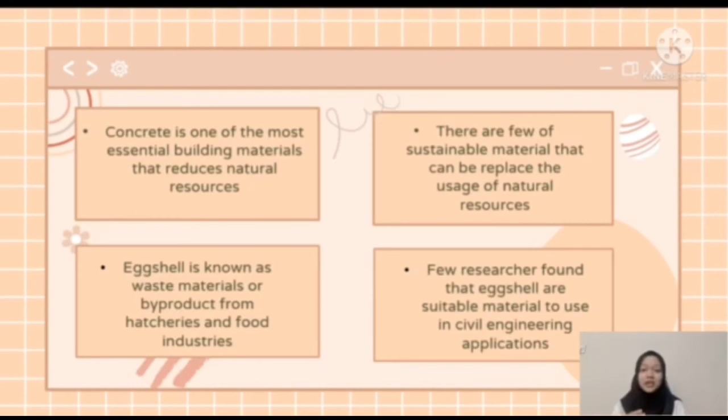In this experiment, eggshell powder will be tested for its possibilities in concrete and the performance of eggshell powder concretes in terms of strength properties.

For the methodology part, it starts with broken eggshells collected from local sources. Shells were cleaned with regular water and air dried for about 5 days at temperatures ranging from 25 to 30 degrees.

Secondly, shells were then hand crushed, ground and sieved through a 90 nm sieve. The material that passed through the 90 nm sieve was used to replace the cement, while the material left behind was discarded.

Next, crushed blue granite was used as coarse aggregate and well-graded river sand as fine aggregate.

Fourthly, coarse aggregate was placed into the mixer drum, and a portion of the required water quantity was poured into the drum. Lastly, cement and eggshell powder were placed into the drum and sand was spread over the powder, then mixing started.

The percentage of eggshell powder that replaced cement in this concrete is about 15%. The remaining mix design water quantity was added into the mixer drum during the mixing process to ensure full mixing of the ingredients.

After that, the specimens were prepared and left for 24 hours before being demolded and put in normal water to cure until the test age.

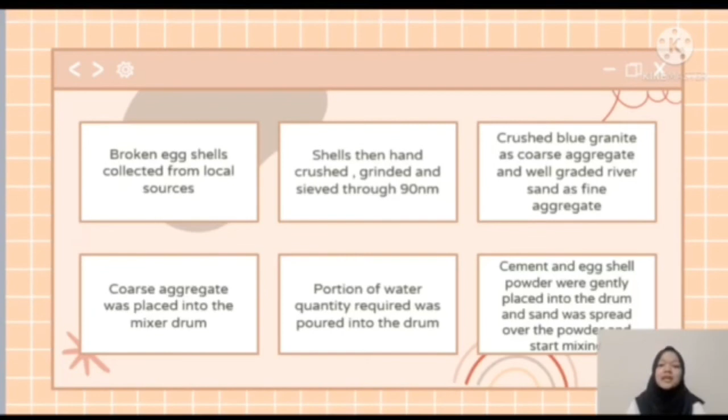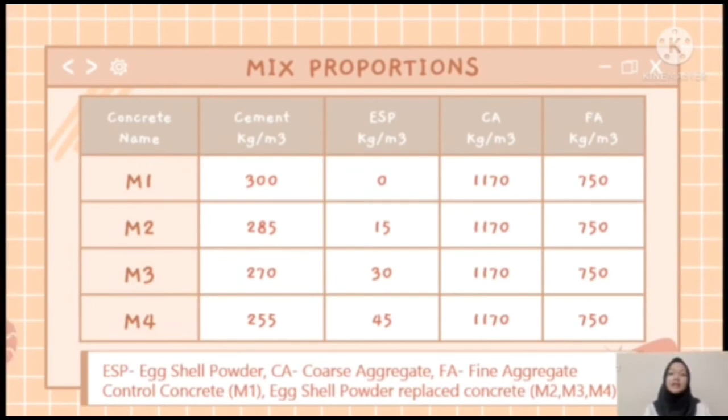For concrete naming, M1 stands for control concrete, while M2, M3 and M4 stand for eggshell powder replacement concrete. So in M1 there is no eggshell powder contained. This is all the quantity needed in the concrete ingredients.

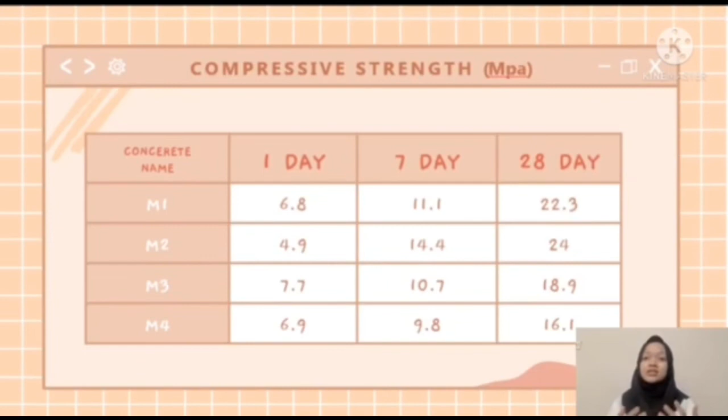This is the table for compressive strength, which is the first test to determine strength properties of concrete. A compression testing equipment with a capacity of 2000 kN was used to assess compressive strength. The test was carried out on 150 mm cube specimens for periods of 1 day, 7 days and 28 days.

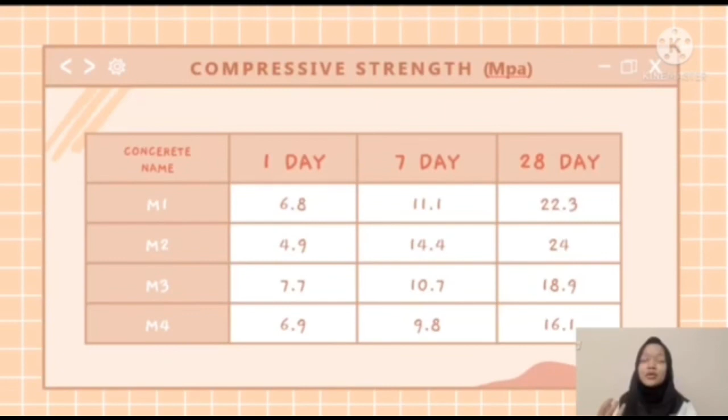The compressive strength test can be concluded as follows: compressive strength was higher than control concrete for 5% eggshell powder replacement at 7 days and 28 days of curing age. Eggshell powder replacements greater than 5% had lower strength than control concrete. So this is what we can conclude from the table of compressive strength.

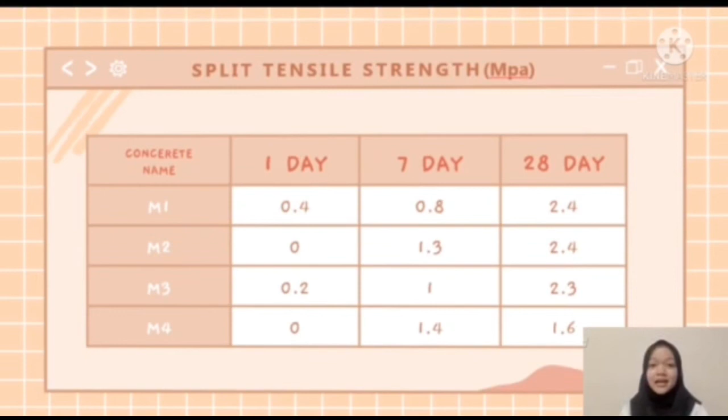Saturated surface dry specimens were stored in a 105 degrees Celsius hot air oven until they reached a consistent weight. After removing the item from the oven, it was allowed to cool to room temperature.

These specimens were totally submerged in water and their weight gain was monitored until they reached a stable weight. The concrete quality was assessed using absorption at 30 minutes and final absorption, which is when the difference between two consecutive readings is almost minimal. All of the concrete's final absorption was found after 72 hours. That's the final time for the water absorption test.

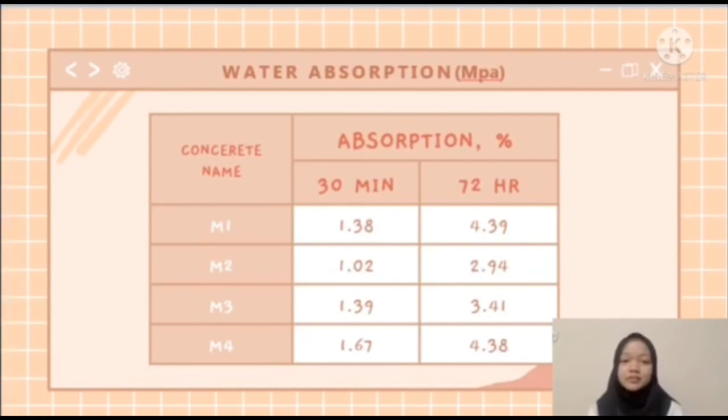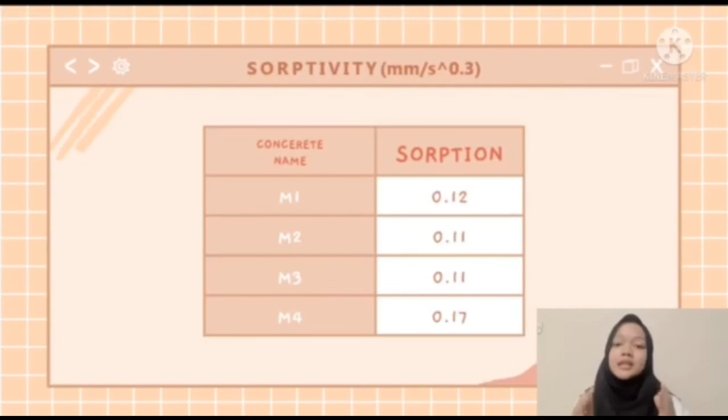The specimen was allowed to cool to room temperature as indicated in the water absorption section. The cubes were placed in the water after the cooling process, ensuring that only the bottom surface of the specimen came into contact with the water. The weight gain of the specimens at regular intervals was used to measure the moisture rise in the cubes. The weight gain of the specimen per unit area of the concrete surface and the square root of the time for the suction periods were then used to compute the concrete sorptivity.

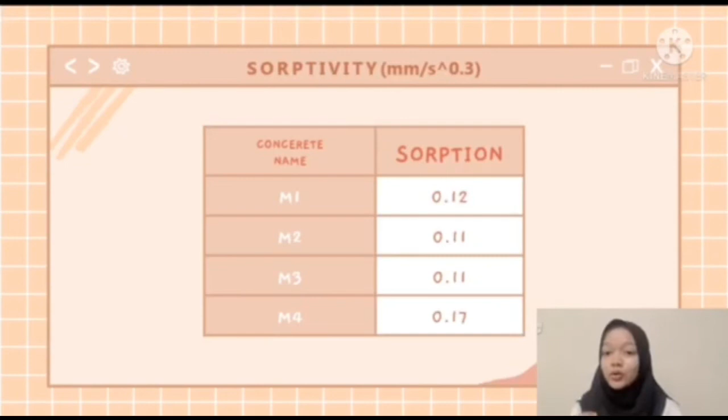From the table, we can conclude that sorptivity of the concrete was comparable with control concrete up to 10% eggshell powder replacement. However, sorptivity of 15% eggshell powder concrete was higher than control concrete. The maximum sorptivity was for eggshell powder replaced concrete, with 0.17 mm per second to the power of 0.5. Sorptivity decreased with strength and increased with water absorption. That's all that we can conclude from the table of sorptivity tests.

In the discussion of this experiment, the chemical makeup of eggshell powder is extremely similar to that of limestone. As stated earlier, eggshell powder and limestone can be tested in the same situation of replaced concretes in strength property.

Point 2: eggshell powder in cement replacement also comes out with different results of strength properties. This can be seen as eggshell powder can result in either high or low strength of concrete after being tested, according to the percentage of eggshell powder added into the concrete mixture, and it also depends on the age of the specimen.

Point 3: there are a few main factors that play an important role in controlling the transport properties of concrete, which are the volume of the paste matrix, the pore structure of the bulk matrix, and the interfacial zone around the aggregate particles.

Point 4: the performance of concrete depends on the particle size of eggshell powder. It can improve the performance of concrete if the particle size of fine aggregates like eggshell powder becomes smaller, ensuring faster interaction with the other components of concrete, as reducing the particle size increases its reactivity.

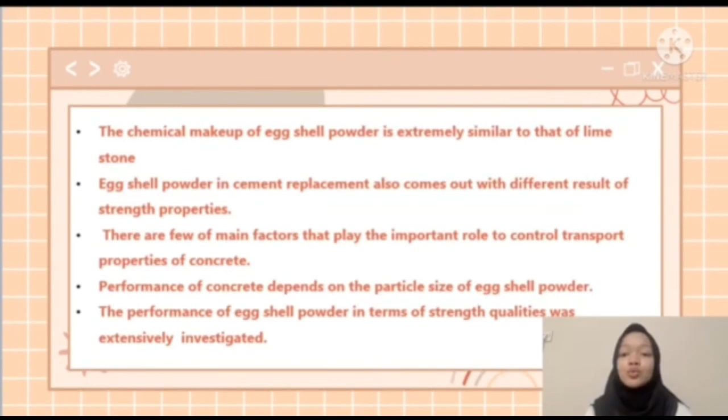The last point of discussion is that the performance of eggshell powder in terms of strength qualities was extensively investigated, including compressive strength, split tensile strength, water absorption, and sorptivity. All of these tests have their own function and purpose toward concrete according to the curing days.

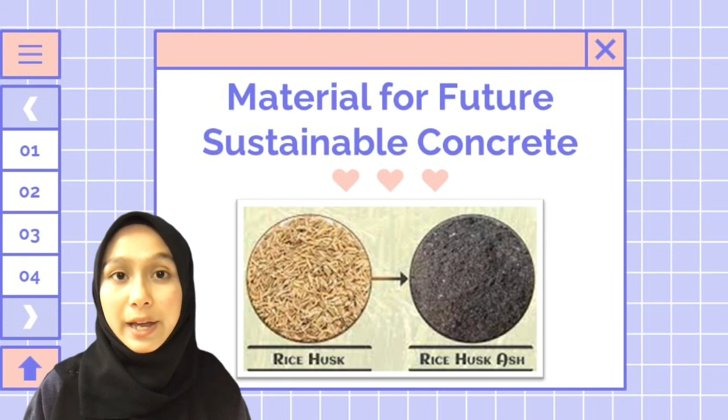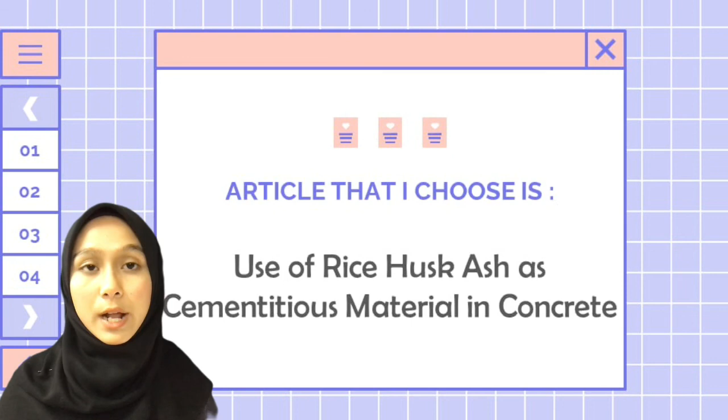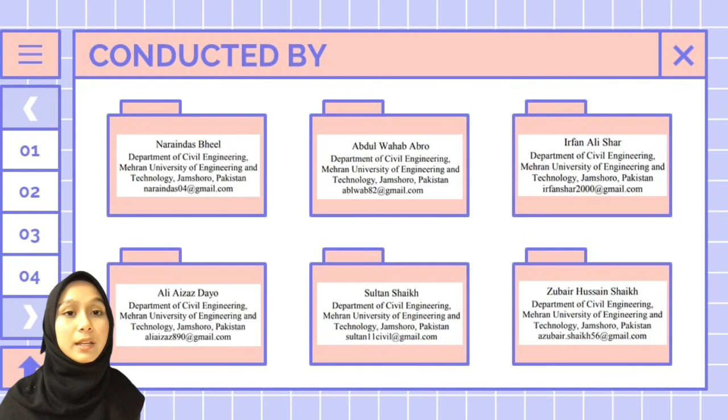In this project, students are required to do research about future sustainable concrete or bricks. As for me, I chose RHA, which is rice husk ash, as the material used in sustainable concrete. For the article, I chose one titled 'Use of Rice Husk Ash (RHA) as the Cementitious Material in Concrete.' This article was conducted by six researchers from the Department of Civil Engineering, Mehran University of Engineering and Technology at Jamshoro, Pakistan.

Firstly, I will explain the introduction. In this article, they focused on the use of rice husk ash (RHA) as a partial substitute for cement in concrete, to reduce its cost and provide an alternative processing method using agricultural industrial waste. The objective of this research is to determine the fresh and hardened concrete properties using RHA at 0%, 5%, 10%, 15%, and 20% by weight.

In this era of globalization, the use of concrete will increase demand for its ingredient resources, which are cement, sand and gravel. The making of cement can produce pollution. It's said that 1 ton of carbon dioxide is produced per 1 ton of cement made, while 1.6 tons of natural resources are needed to produce 1 ton of cement.

This shows that using natural resources is better than manufacturing cement, which produces carbon dioxide. It can reduce waste and carbon dioxide emissions into the surrounding air, which can affect the human respiratory system. So having RHA as a replacement for cement can help save the world from pollution.

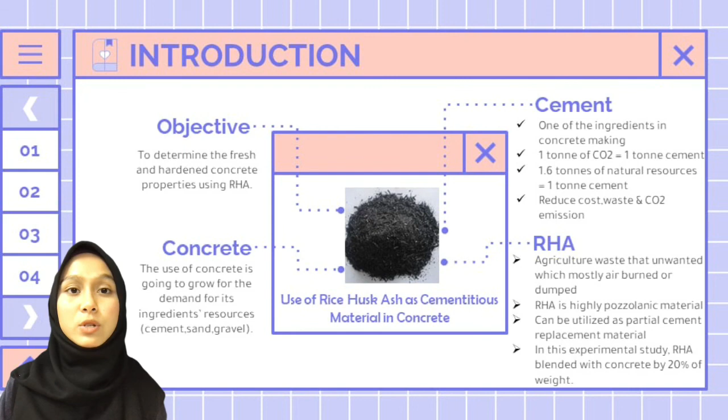Besides, RHA is an agricultural waste that is unwanted, mostly air burnt or dumped. To avoid wasting it, RHA is used in making concrete. RHA is a highly pozzolanic material that can be used as an additional material in concrete, decreasing environmental problems. It also has a silica content that can be utilized as a partial cement replacement material. So in this experiment, RHA was blended with the concrete at 20% by weight.

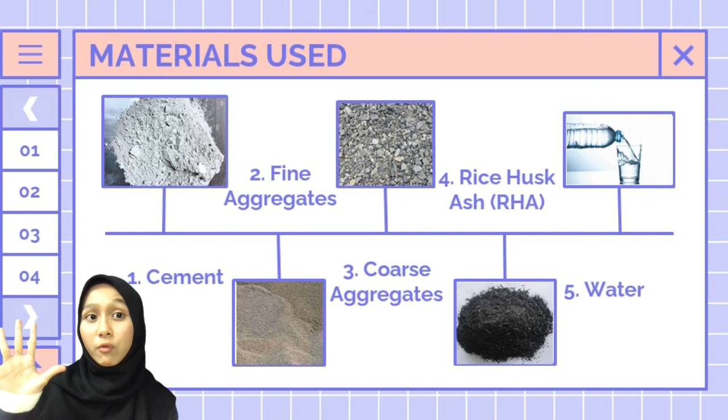Secondly, I will explain the method used in this research. The materials used are cement, fine aggregate, coarse aggregate, rice husk ash (RHA), and water. The tests were done using a total of 90 concrete samples, 45 cube samples and 45 cylinder samples. Several trial mixes were prepared using variable cement or binder, coarse aggregate, fine aggregate and water to get the optimum mix.

While getting the desirable mix, RHA was used as a cement substituent material to determine the characteristic strength of the concrete specimens. Ultimately, these concrete specimens were tested on a UTM while obeying the British Standard BS code. In this study, concrete cubes were cast for compressive strength testing, and cylinders were cast for splitting tensile strength testing. Three concrete specimens were cast for each proportion, and an average value of the three specimens was taken as the final result.

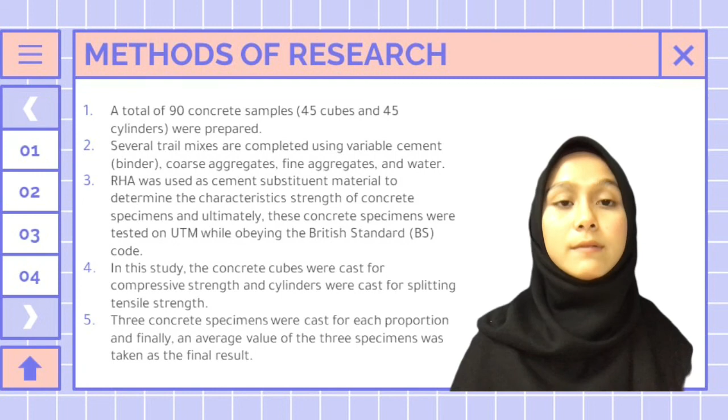Based on this article, the work was completed in the concrete laboratory of the Department of Civil Engineering, College of Science and Technology. Third, I will describe the results and discussion of this research. The findings are classified into three tests: Test A, Test B and Test C. The data was tabulated in a graph.

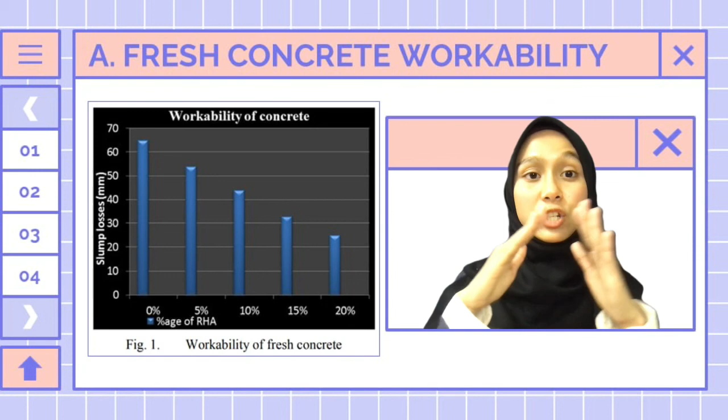First, an experiment was done to know the fresh concrete workability. A test of the flow of fresh concrete was conducted using a slump cone, with dimensions of 10 cm top diameter, 20 cm bottom diameter, and 30 cm height. The graph shows the maximum flow of concrete was 65 mm while using 0% RHA as cement substituent material, and the minimum workability was 25 mm at 20% RHA by weight. It was concluded that the flow of fresh concrete decreases with an increase in the amount of RHA in the concrete. The experimental results are shown in figure 1.

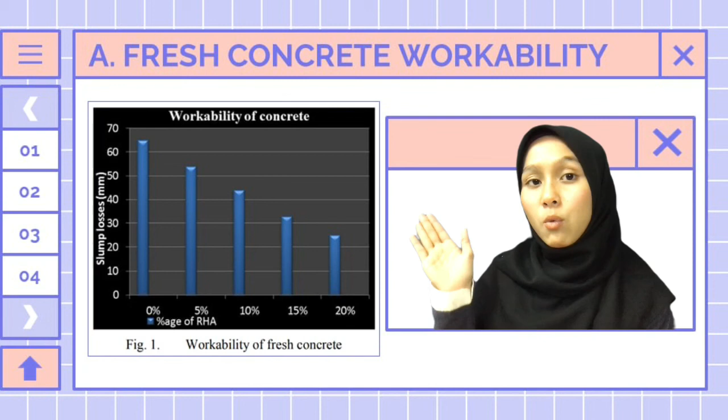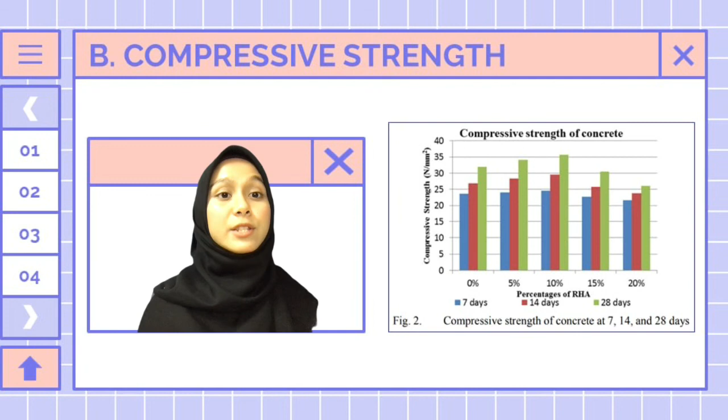Next, Test B, the compressive strength test, was conducted on cubes with volume 100 mm x 100 mm x 100 mm using different RHA percentages. Three specimens were cast for each proportion, and an average value was taken as the final result. The compressive strength was maximum at 10% RHA used as cement substitute material, and minimum at 20% RHA, at 7, 14 and 28 days. The results are shown in figure 2.

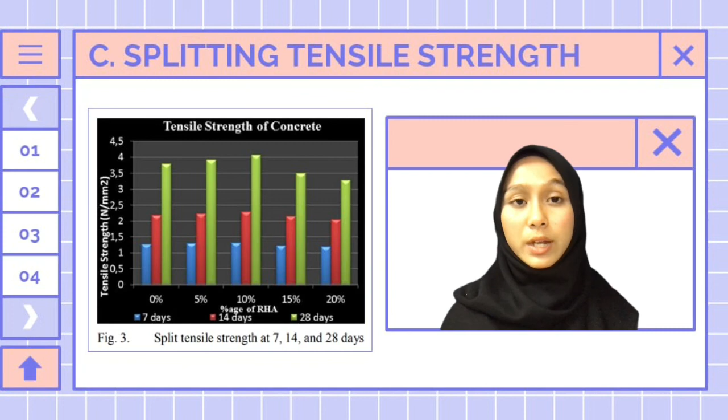Third, the splitting tensile strength test (Test C) was conducted on cylinders measuring 200 mm x 100 mm with various RHA percentages, cured at 7, 14 and 28 days. Three concrete samples were cast for each proportion, and the average was taken as the final result. The maximum splitting tensile strength was noted at 10% RHA, and the minimum at 20% RHA. The cylinders were tested on UTM. The experimental results are shown in figure 3.

So what we can conclude from these three experiments is that the flow of fresh concrete decreases with an increase in the amount of RHA in the concrete.

For the first experiment, the flow of fresh concrete was noted maximum while using 0% RHA as cement substituent material in the concrete. The minimum value of the workability was recorded at 20% RHA.

In the second experiment, the compressive strength test was maximum at 10% RHA concrete and minimum at 20% RHA concrete at 7, 14 and 28 days.

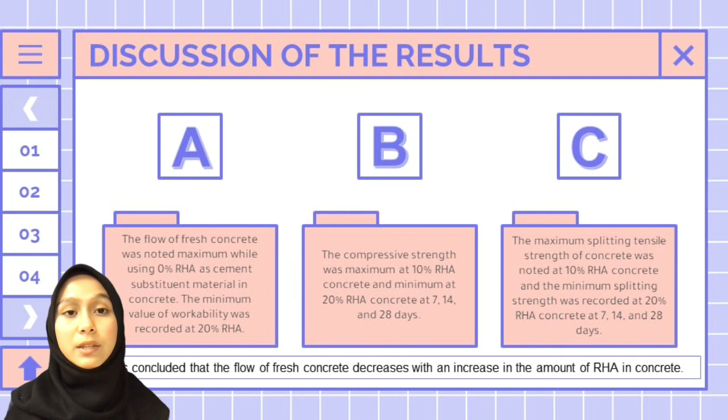For the last test, the maximum splitting tensile strength of concrete was noted at 10% RHA concrete and the minimum splitting tensile strength was recorded at 20% RHA concrete at 7, 14 and 28 days. From the article I have described, it shows that RHA is suitable as a replacement of

cement for future sustainable concrete. It also shows that RHA can reduce the cost, waste and pollution in concrete making.

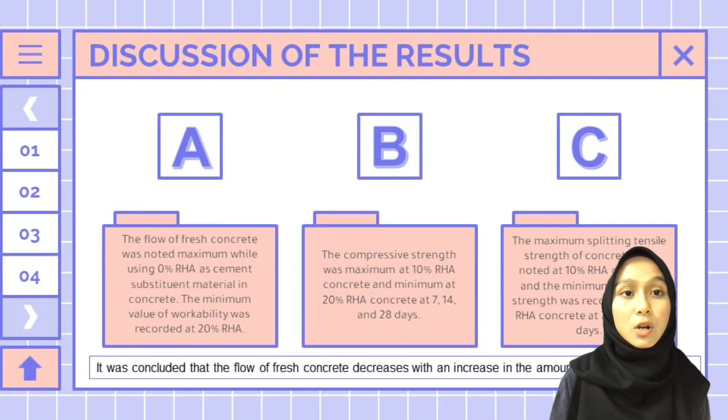Today I want to present to you my research on future sustainable concrete that has potential in civil engineering. This research is based on studies carried out by this researcher.

The sustainable product used in this research is coal bottom ash. It was used as a replacement for fine aggregate in concrete.

What is coal and how is coal bottom ash produced? Coal is the main source for electricity and heat. The coal was burned through a combustion process at the thermal power plants.

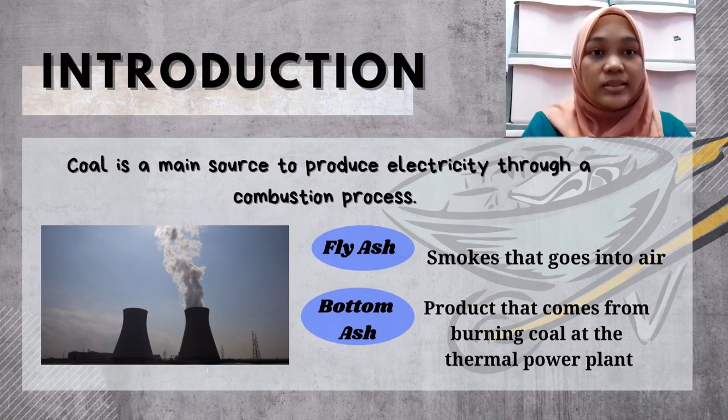Through the combustion process, the burnt coal will produce smoke which goes into the air, which is also known as fly ash. The bottom ash comes from the burning coal, which is generated at the thermal power plants.

The main problem is that the production of coal keeps increasing every year due to the high demand for electricity. As coal production increases, the ash from the burning coal will increase and remain unused, being sent to landfills for disposal.

To solve these problems, there is a necessity to use coal bottom ash for sustainability.

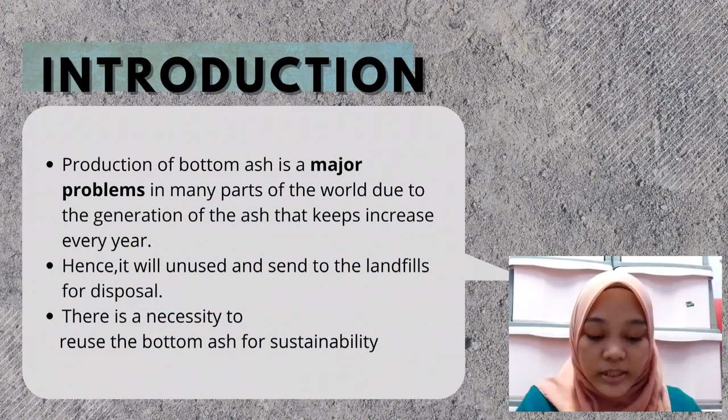Concrete is the crucial material for the construction industry, used to construct high-rise buildings and other infrastructure. Thus, it is important to observe the properties of the concrete.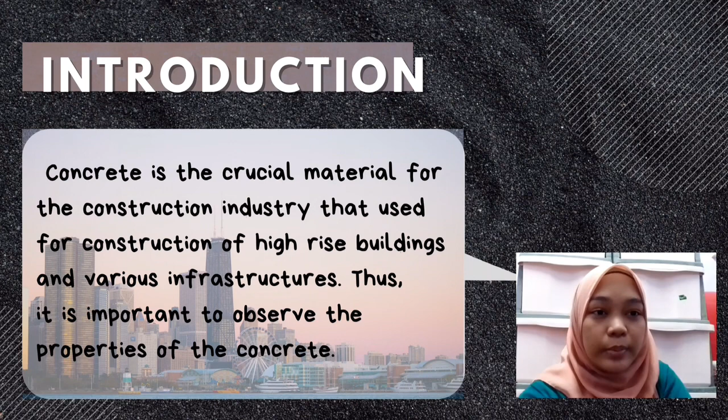Concrete was produced by a mixture of cement, fine aggregate, coarse aggregate, and water. It has its own properties, which is moderately high compressive strength but lower tensile strength. Adding other materials in the mixture of concrete may change the properties of the concrete.

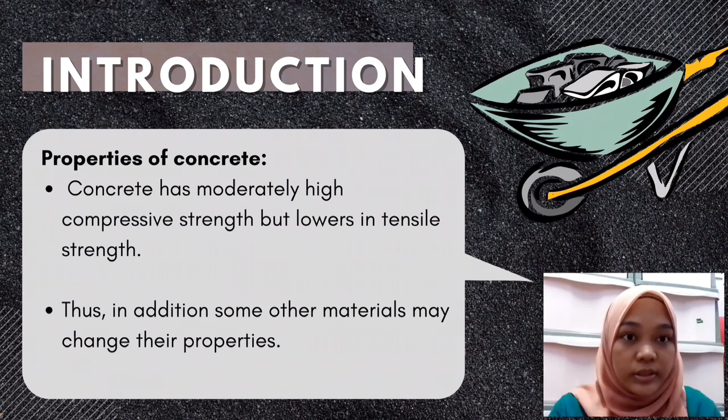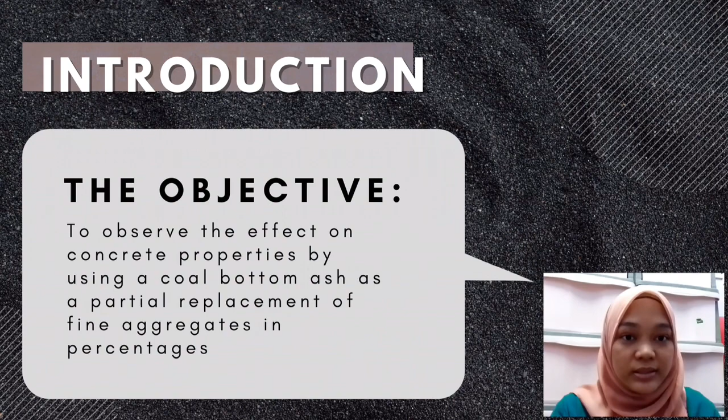So this becomes my main objective, which is to observe the effect on concrete properties by using coal bottom ash as a partial replacement of fine aggregate.

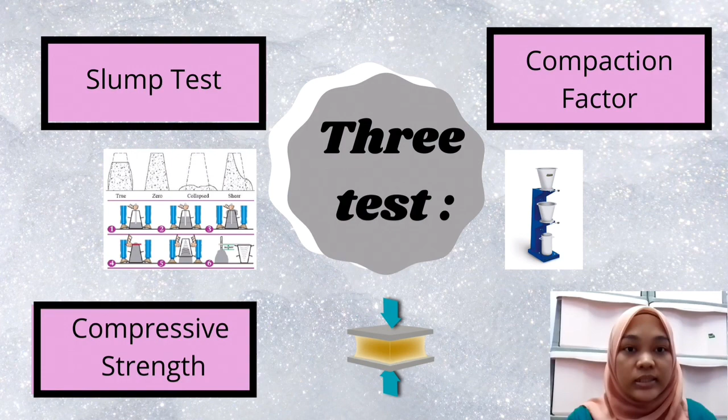Next, the methodology used by this researcher involves 3 tests: Slump Test, Compacting Factor, and Compressive Strength. Slump Test is the most common test for determining the workability of fresh concrete. It can be performed in the laboratory or at the construction site directly.

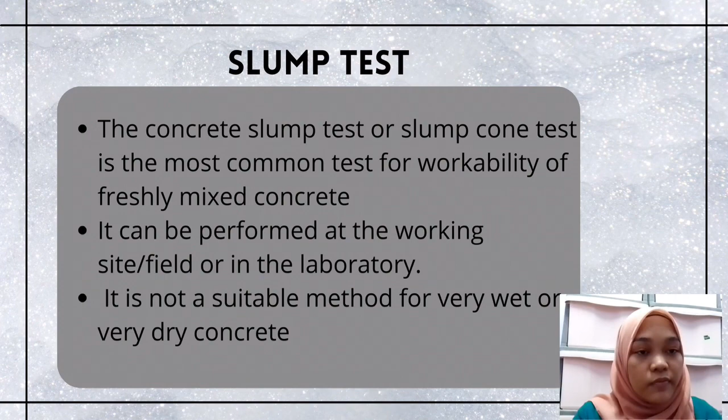However, it is not suitable for very dry or very wet concrete. The result obtained from this test is a slump value, which indicates the workability of the fresh concrete.

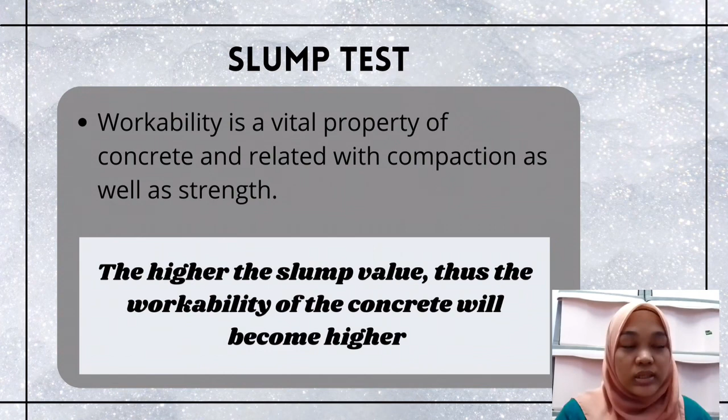Next, the test used in this research is the compacting factor test. Compared to the slump test, it is used to determine the degree of workability of the fresh concrete.

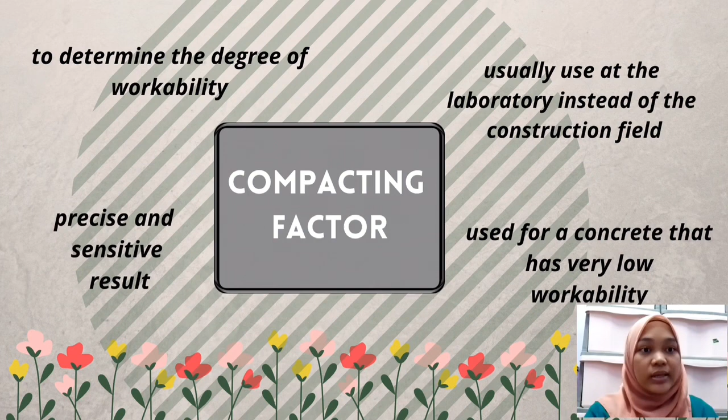It is usually used in the laboratory, but it can also be used at the construction site directly. However, it is very rare to use at the site because it needs a large device.

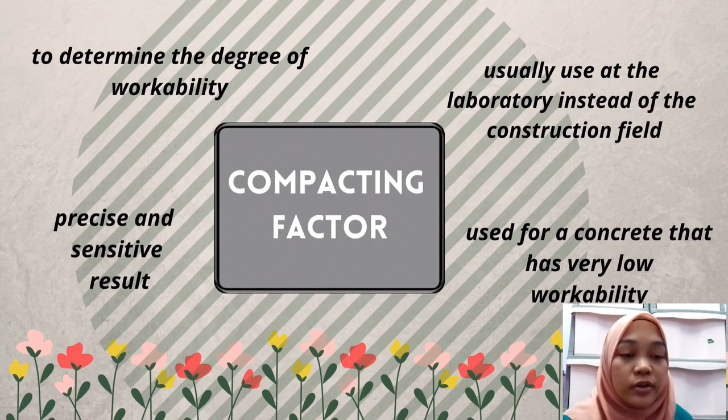The advantage of this test is that it is more precise and sensitive than the slump test, and it is usually used for fresh concrete that has very low workability.

The last test used in these studies is compressive strength. Compressive strength can be defined as the capacity of concrete to withstand the load that pushes towards it before failure.

This test is very important among many tests applied on concrete because it gives the idea about the characteristics of the concrete.

This compressive strength was measured by breaking the concrete specimens using a compression testing machine. In these studies, the compressive strength was measured after curing at 7, 21 and 28 days, because concrete gains its maximum strength at 28 days.

In order to determine how much capacity the structure, or this bottom ash concrete, can resist under compression, this test will be able to show the ability of the material to resist failure in the form of cracks or fissure.

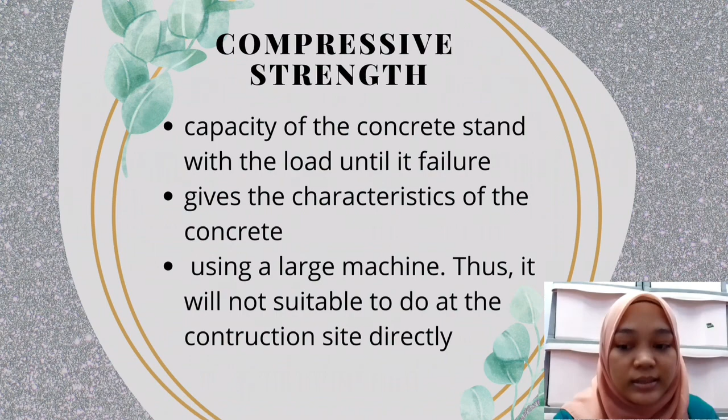However, in my opinion, this test was not good because some of the testing equipment is not available for use in the field.

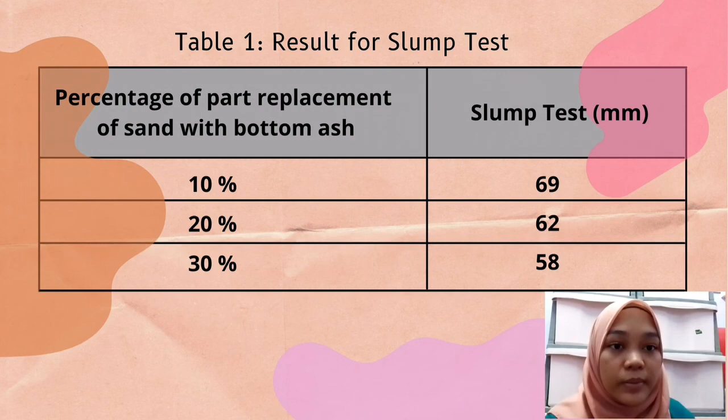Next, the results obtained in these studies for the slump test: as we can see, the slump value became lower. This means this bottom ash concrete has low workability. In this test, the value was from 50 mm to 90 mm, which is a type of medium workability. It will be easier to mix, place, and compact without any segregation. Since this concrete has medium workability, it is typically used for normal reinforced concrete placed with vibration.

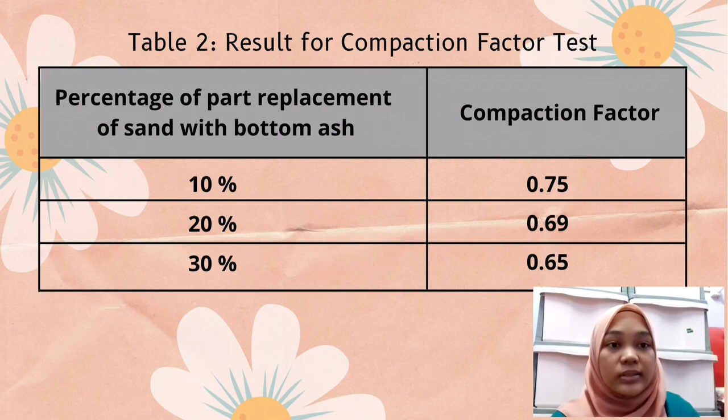As for the compaction factor result, the range of compaction factor values is from 0.65 to 0.75. Thus, the standard of workability for this bottom ash concrete is very low.

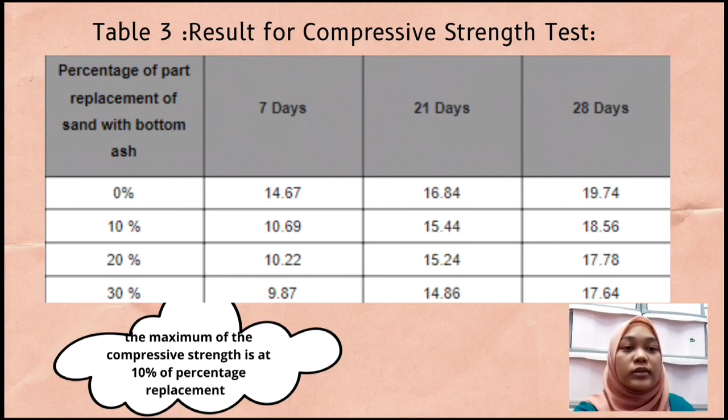Next, for the compressive strength test, the maximum strengths obtained in these studies are 18.56 N/mm², 15.44 N/mm², and 10.69 N/mm², at 28, 21 and 7 days respectively. At that time, the least percentage of bottom ash was used as the replacement in the concrete.

For the discussion, in this laboratory, some percentage of coal bottom ash was used to replace the fine aggregates. Bottom ash particles are much coarser than fly ash. It has an angular and porous surface texture. Bottom ash contains high carbon content and exhibits high shear strength. With this characteristic, bottom ash is an ideal material for design construction. Bottom ash is an economic material because it not only has good engineering properties but also construction benefits.

Based on the studies conducted by this researcher, the workability of the concrete was determined by the slump test. The workability varies when different percentages of bottom ash are added into the cement. The workability of the bottom ash concrete decreased with the increase of ash content. Bottom ash was found to consist of an angular and very porous surface texture, so it will easily absorb water.

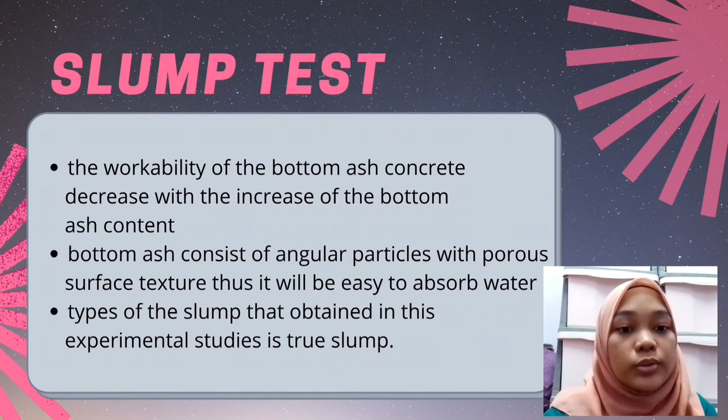Slump can be classified into three types: true slump, shear slump, and collapse slump. In these studies, the type of slump is a true slump. Moreover, the workability of fresh concrete containing bottom ash shows a lower value due to the higher amount of replacement, which requires huge amounts of water, affecting the workability. So the porosity and irregular shape of the coal bottom ash particles can influence the workability of the mixed concrete.

What I can conclude based on the results is that workability is an important physical parameter that should be observed because it will affect the strength and durability of the concrete, as well as its appearance. It must be measured to ensure good quality concrete.

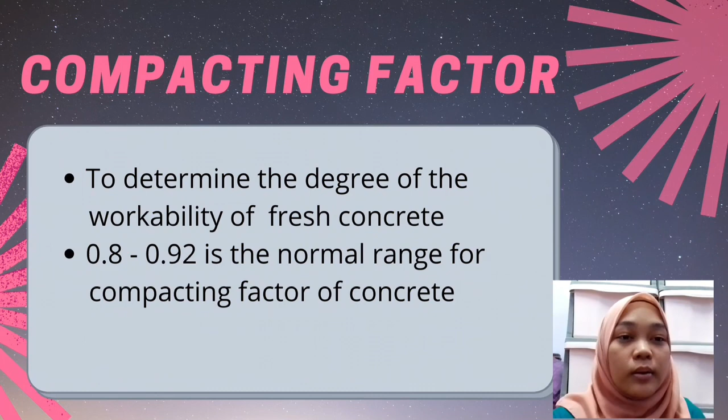For the compacting factor, as I said before, it determines the degree of workability of the fresh concrete. Compaction factor can be defined as the ratio of the weight of partially compacted concrete to the weight of fully compacted concrete. The normal range for the compacting factor should lie between 0.8 and 0.92. However, in these studies, the range is 0.65 to 0.75. This is due to replacement of the fine aggregate with coal bottom ash.

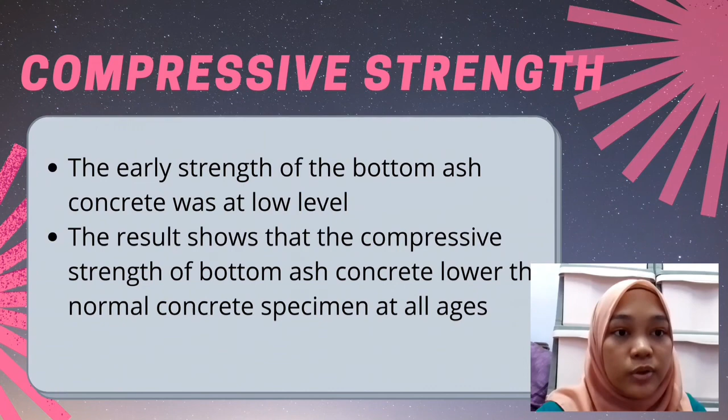Lastly, the compressive strength test was carried out at curing times of 7, 21 and 28 days. It shows that the early strength of the concrete was low due to the higher percentage of replacement and the effect of the short curing period. However, due to the pozzolanic action in bottom ash, the concrete will reach its optimum strength beyond 28 days. In addition, these studies show that the compressive strength of bottom ash concrete is lower than the normal concrete specimen at all ages. This is because of the amount of water in this concrete. Bottom ash concrete has higher water absorption compared to normal concrete.

As a conclusion, for using coal bottom ash as a replacement of aggregate, bottom ash is acceptable to be used in construction. Moreover, it can be used not only for fine aggregate but also as a replacement for coarse aggregate and cement.